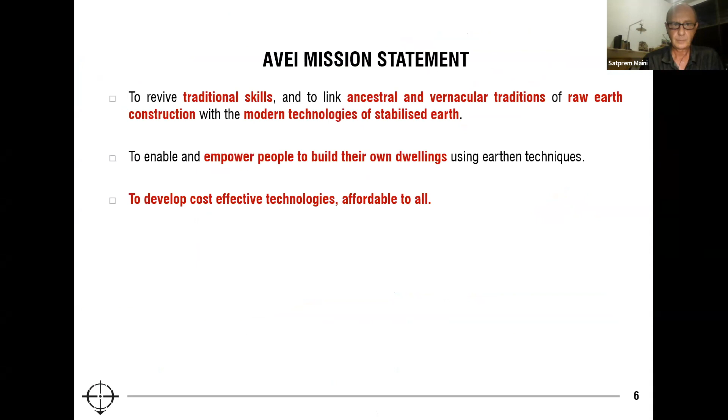So our mission statement is to revive the traditional skills and to link ancestral and vernacular traditions of raw earth construction with the modern technologies of stabilized earth. To enable and empower people to build their own dwellings with earth, to develop cost-effective technologies affordable to all, and important for us, to respect our Mother Earth while using its resources to build a sustainable future. So we try to demonstrate that earth as a building material can be used for creating a modern, progressive, eco-friendly, and safe habitat.

So our premises, which are developed over the years, according to the needs of the development of the Institute. We started with this building here in 1999, this also in 1999. This was built in 2000.

So our philosophy on sustainability: we lay a lot of emphasis on the proper management of both human and natural resources. And we place first human resources, because if people know what to do, then they can have a proper management of natural resources. So we give a lot of awareness programs, training courses, educating people to allow them to manage properly their resources and to give them a livelihood and a skill.

And then comes after, for us, the natural resource management, because people, once they know what to do, can manage properly the resources, to have a properly built environment using the natural resources. It is possible to use earth, especially in respect for nature and for people. So we have trained a lot of people from all over the world, on all continents. A few examples of people that we have trained here.

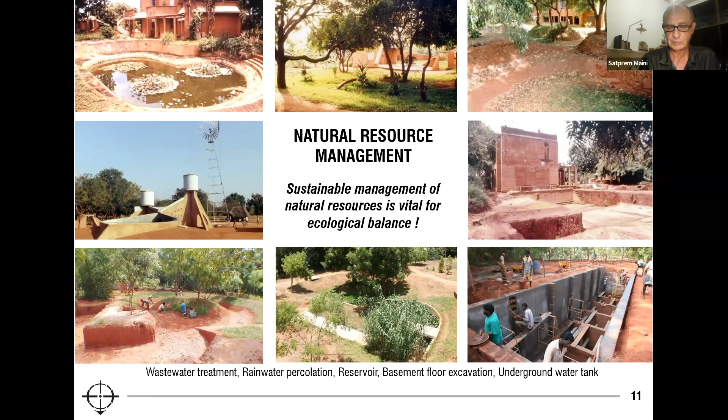So now we'll develop the training activity that we have done in Auroville. We started in 1990, but we were founded in 1999.

So, hello? Yes? Hello? Everything is fine? Okay, yes. Let's go on. Yes, let's go on.

So yes, in fact, I joined Auroville on 31st August 1989, and I started to train people in February 1990. So this is towards the dissemination of earth-based technologies and earth architecture. We have regular courses in Auroville. We have courses for architects, engineers, technicians, students, and masons. We have awareness programs on different topics, long-term internships for architects, engineers, and students. And then we do on-the-job training on different construction sites, since we train local people, from masons to architects, to build something.

We have also other programs in India and abroad. And we have also the courses and on-the-job training. That's what I was doing in Syria for the last 3 months. So of course, we go to different conferences, congresses, and symposiums.

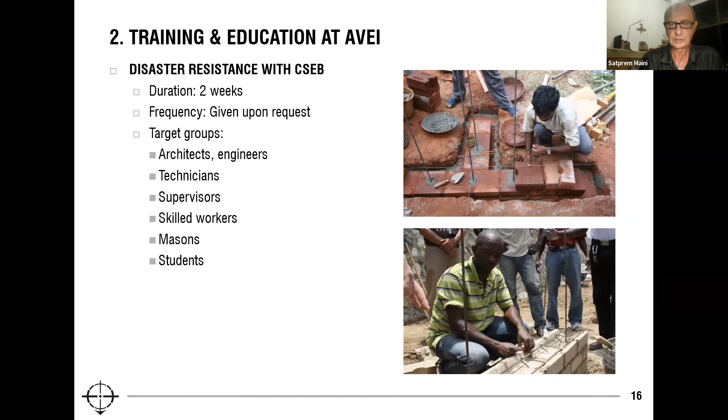Then we have disaster resistance. This was, for example, in Haiti in 2010. This was in Auroville for a project for Nepal. So these courses on disaster resistance are given upon request, because luckily there are not disasters or major earthquakes in the world every year. So we just give these courses when people ask for them, like it was the case for Haiti.

Then we have theory of arches, vaults, and domes, AVD. So we have 1 week for the theory, where people can learn and design some vaults and domes either working on computers or on tracing paper or using this kind of boards here. Then we have masonry with arches, vaults, and domes, where people enjoy building different types of arches or vaults or domes.

Then we have awareness programs, which are given upon request. So this was in Gujarat after the earthquake of 2001. This is in Auroville for different programs that we have. And then we have more and more demand for these training courses. Of course, with COVID, we had a big stop for almost 1.5 years. But now we start again the courses because COVID is receding, luckily. We start again the training courses here.

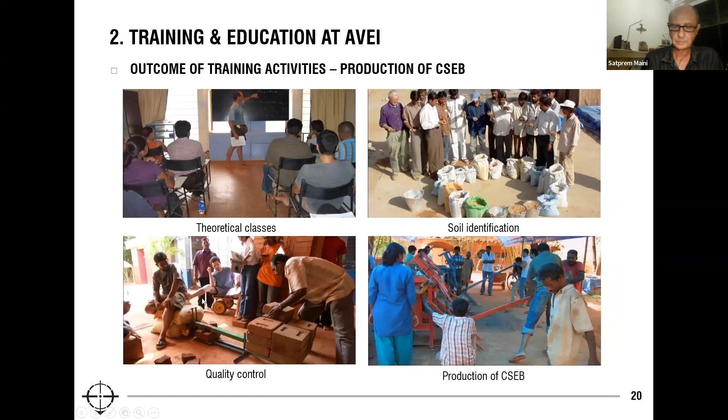And outcome of the training activities. So these are the theoretical classes, soil identification. This was in Gujarat. This is in Auroville. Then again, these are the lectures, bond pattern here. We're doing some rounders walls, rounders foundations, composite techniques like a U-block with concrete inside. So U-CSEB with concrete inside.

Hello? Yes, I can go on.

Then we have outcome of the training activity with arches, vaults, and domes. People enjoy a lot the study of the AVD, either by hand on the tracing paper or on computers. And then you can study that in 1 week. So this can be the result in 1 week work. And then they enjoy a lot building all kind of stuff. So they play a lot.

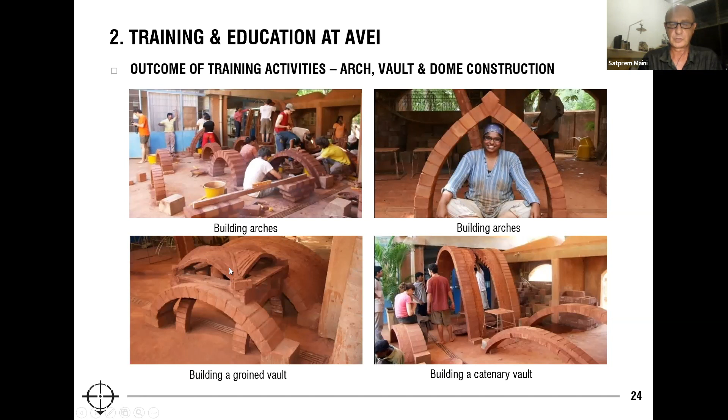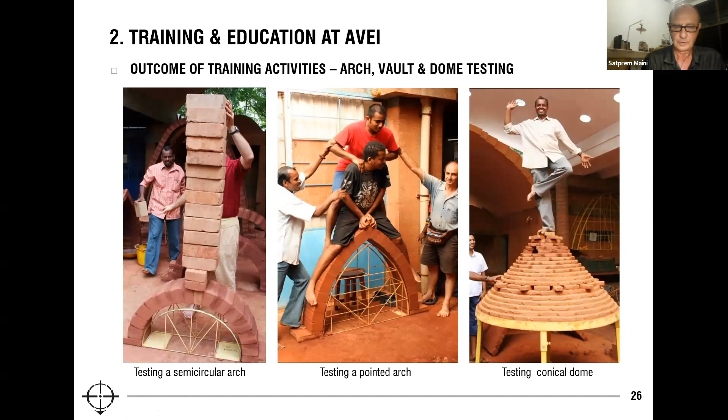So now a small summary, I will go a little fast because this is just numbers. We have trained a lot of people from all over the world. We have in general a little more than 1/3 of foreigners coming to India. So we have different types of activities like awareness programs, courses of 1 or 2 weeks, long-term courses, different courses in India, mostly awareness courses and short-term on-the-job training, and outside also.

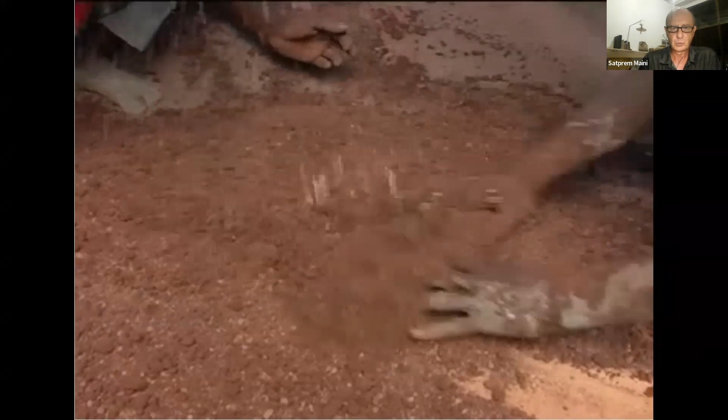So here we mix some soil, 200 liters of soil, 30 liters of sand, and some cement, 5% cement by weight. We mix it dry first. So now we add water, mix it again by hand. And then when the mix is ready, we pour it into the press with a scoop, a hand shovel. We slide the hopper. And when the hopper pushes back, we always level the soil with the same amount of soil into the mold. Then we close the lid.

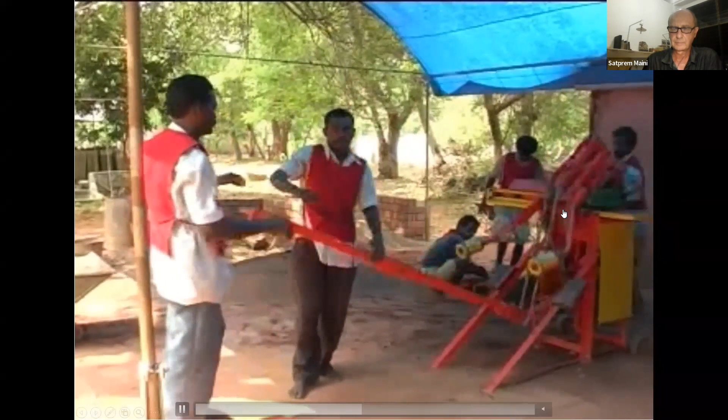So here we have two people pressing the lever to apply a force of 15 tons on the lid. Then there is automatic opening of the lid. And the block is pulled out. So this device is for the strength of the block freshly made. It's called the pocket penetrometer.

When you press till this depth here, you have a certain strength given by the spring, and the penetrometer should not go more than 6 mm. So this is the world standard. So if it goes by 6 mm at this level, the block is well compressed. But you can see here that the penetrometer goes by 2 to 3 mm inside, because our machine compresses more than the average.

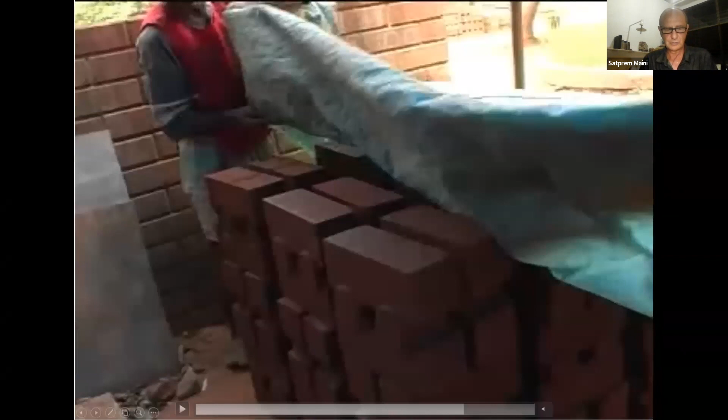And then after that, the block will be stacked near the machine and covered with plastic sheets for 2 days, because we should not allow the block to dry. As you have some cement or lime also sometimes, you have to cure the blocks. It means keep them humid, and you have to keep the block humid for 4 weeks. But the first 2 days are critical. That's why you have to cover them with a plastic sheet to avoid any evaporation.

And after 2 days, the block can be moved outside on wheelbarrows and stacked in a big pile like this and cured for 4 weeks. That means they will be left in the sun and then watered for 4 weeks, 2 or 3 times a day. The principle is that the block must never dry for 4 weeks when you have some cement. If you use lime, it will be slightly different, but you have to cure the blocks also. So these blocks are for earthquake resistance. They're called hollow interlocking blocks.

So now we see, yes, maybe, yes, I can see it. So here you have a CSEB and a fire brick, which are produced locally. So you can see the difference. So this block has 5% cement inside.

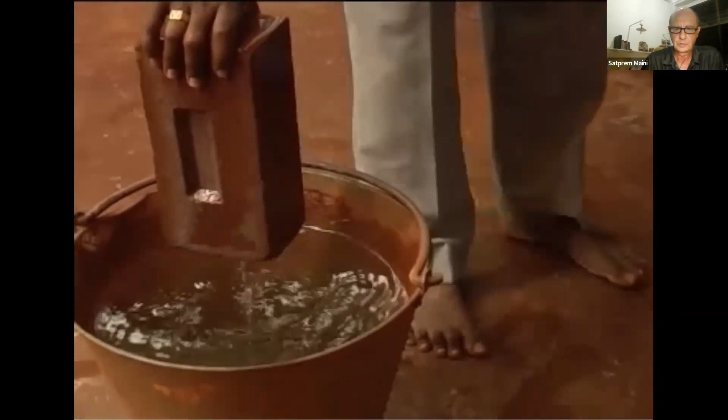And then we see, no, sorry, I already showed that. So this block is in water for 2 hours only. So IIT, the co-director, just steps on it, because often people ask what about the strength when the blocks are wet. So this shows the blocks have 5% cement, in water for 2 hours only. Of course, it can withstand the load of IIT, the co-director.

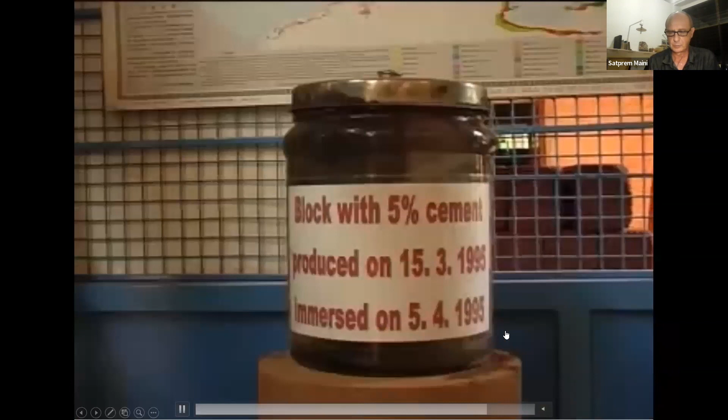But these blocks have been in water since the 5th of April 1995. This means in water for the last 27 years, 1 month and 1 day today. Always in water. And of course, it can resist the load of IIT easily. Of course, this is not a scientific test, but it marks the mind of people because it shows them that, okay, this can resist water and it can take some load.

If you press this block on the testing machine, it will have a strength of about 3 to 4 megapascal. That means 30 to 40 kilos per centimeter square of crushing strength. So now we see the motorized machines which are developed with the workshop Aureka, because we are in collaboration with Aureka. The workshop manufactures the manual machines, and they developed these motorized machines: crusher, motorized mixer, and hydraulic press.

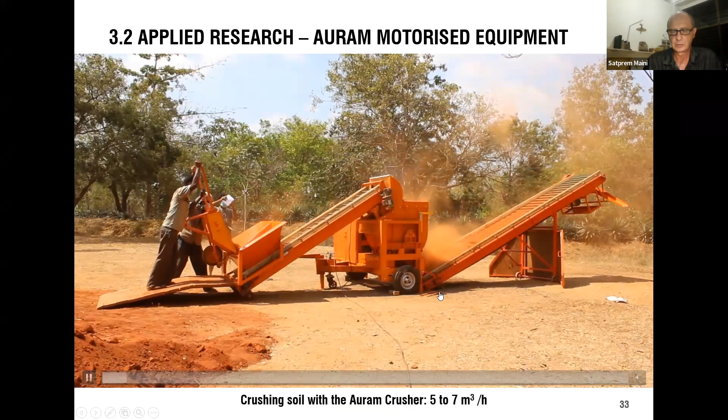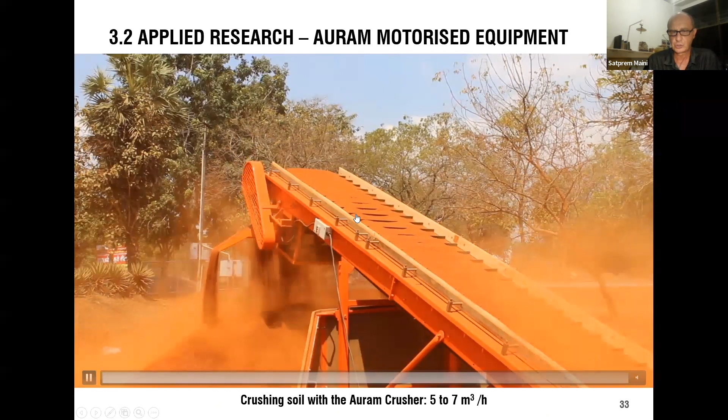So now we can see the crusher in operation. This was a prototype machine with a diesel engine. Now we have only electrical motors. You load the crusher with wheelbarrows. The soil has a lot of lumps, some rocks sometimes. So the helper here helps the loader crush big lumps. The crusher can break lumps up to 100 mm, even stones of 100 mm, and it will come into dust. This is the result after crushing: very fine soil, very fine dust.

The soil can be moved by bobcats, or the crusher can be slid away. It can be rolled, it can be pushed on the wheels. So now we see the mixer and the block making with the mixer. Here we have the sand on one side. We put the sand. We have a partition plate here which can control the amount of sand and amount of soil, because most soils need to have some sand added. Soil on this side.

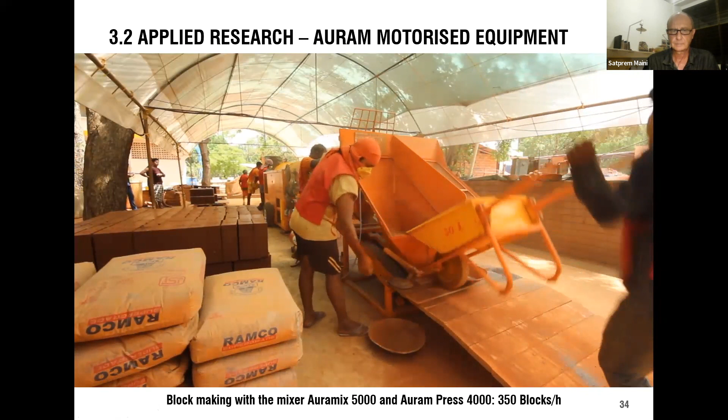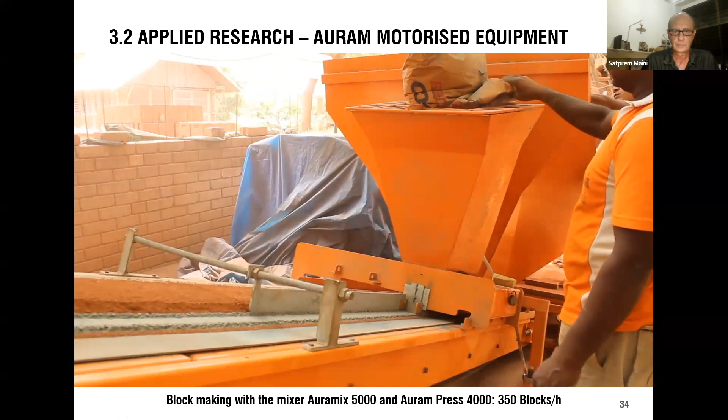In front, you have the hopper for the cement. Behind here, there is a vibrator to help the cement flow down. In front, you have a kind of gate to control the amount of cement you want in the mix. So here we have 5% cement coming to the soil. Soil is here, sand is just behind. Here, the workers control the water flow. There is this valve, and the spray inside the mixer controls the amount of water.

At the beginning of the production, the first minutes of production with the mixer. The mix, sorry, I missed it, I have to go back. Let me see. Come back a little bit.

Yes, in the first minute of the mixer running, the mix is either too dry or too wet. That's why the operator checks that the moisture content is correct. And this one will not be wasted. It will be put back at the beginning of the mixer, poured slowly into the mixer. So now the mix is okay, the moisture content is fine, and this goes to the press. And the helper takes back the first mix and puts it back slowly into the mixer.

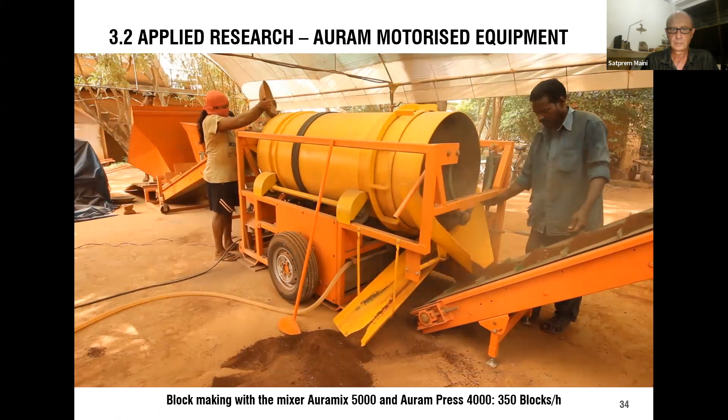So this is a continuous mixer, which gives a really high output. And then the press here. This was a prototype machine. The machine has evolved a lot. This was the first machine, done in 2014, I think. So we have here manual closing of the lid. You see the operator close the lid manually, operate one valve to compress, automatic opening, push the hopper to push the block. The speed of the machine is given by the speed of the operator.

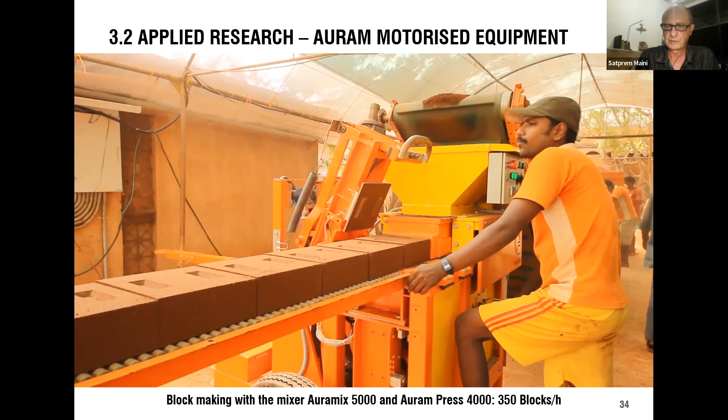This was important for me, developing motorized machines to have a better output per day and make work much easier for the workers, because pressing blocks by hand is a really hard job. So here, for this team with the crusher, mixer, and press, we still have between 18 to 22 people, depending on the type of block yard. But you have more than 2,500 blocks per day. So now we have to control the quality. Again, the penetrometer: you see it goes very little inside because the blocks are stronger with the motorized machine than by hand.

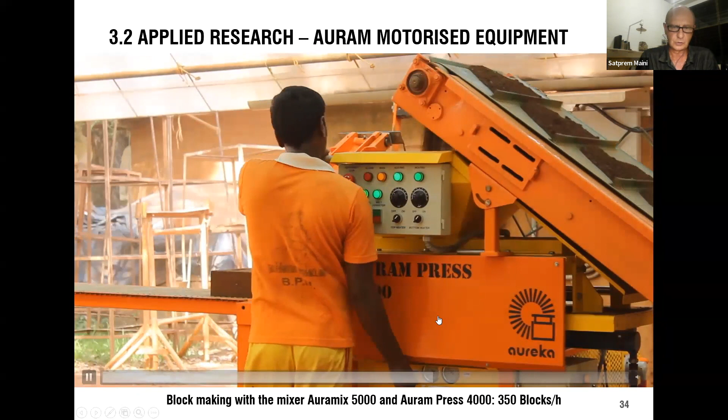So now we stack the blocks on pallet, then we remove the pallet on the side. This means you should have enough investment on the side to have pallet, pallet jack, and forklift, which is the best in fact for the production.

After, we have the pallet wrapped with cling film to allow the block to be cured properly, and also to be moved easily without the pallet opening and breaking down. So here we put some extra water for the curing, because as we have the cling film, we don't have to cure the blocks by watering like we did for the pile outside under the sun. That's why we cover with cling film, and we cure for 1 month.

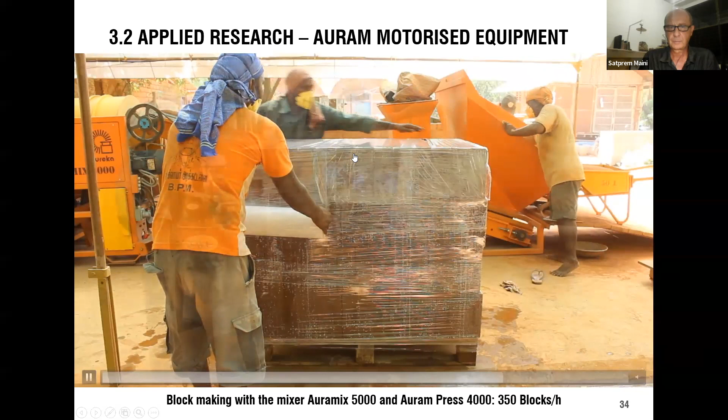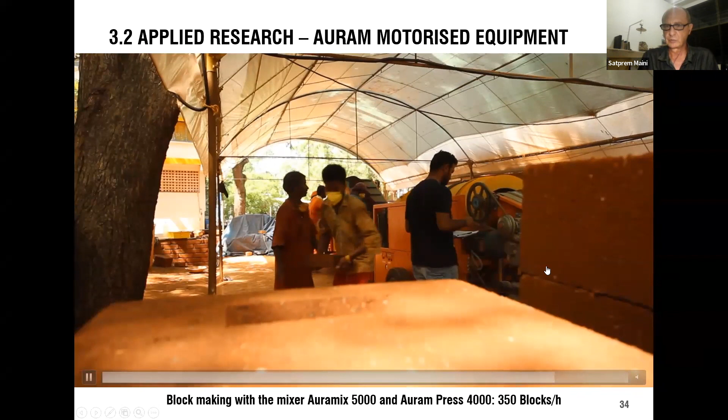And so now the pile is ready to be moved outside. If you don't have a pallet jack and forklift, you can stack on the ground with the workers, but you need more workers for this process, and sometimes you may have to stop the machine to move the blocks. It's always about finding the optimum investment for the machinery and the manpower on site.

So now we're seeing the different things on the compressed stabilized earth block, the machine, the Auram Press 3000. It's composed of soil, cement, often 5%, it can also be lime, and often you have to add some sand, and then you press it.

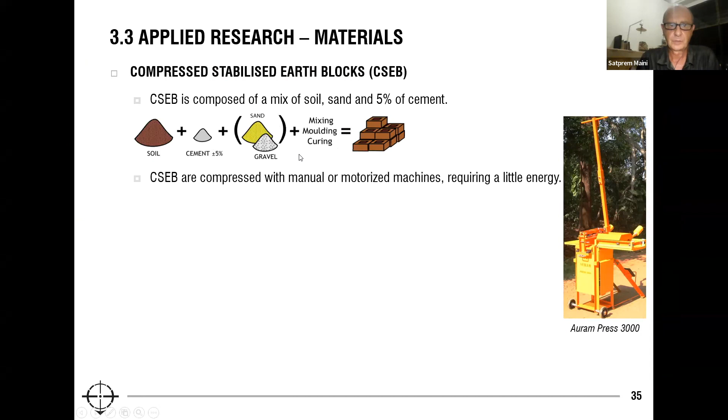And then we have here, they are compressed either manually or with a motorized machine, like you have seen. They don't require a lot of energy. They're not fired, meaning they emit much less carbon emissions compared to what we call country fired bricks. You will see some photos of that after.

I will go a little faster because after we have a full lecture on CSEB. So yes, we do a lot of research on the type of blocks. We have here about 70 different blocks produced with one machine. So we have energy efficiency.

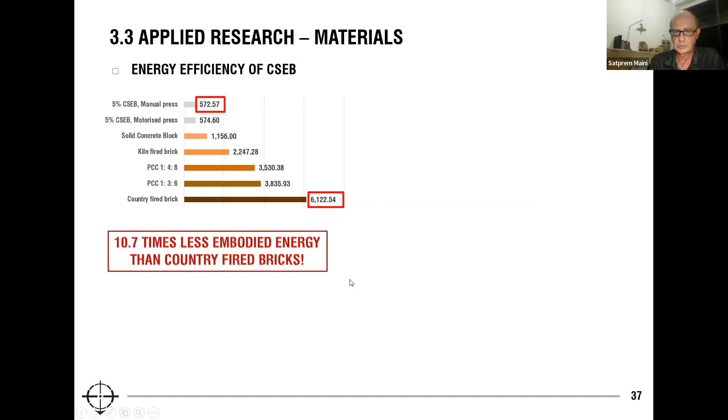We have about 10.7 times less embodied energy than country fired bricks in India. Then we have carbon emissions 11.8 times less. If you compare to concrete blocks, it will be about 4 to 5 times less. If you compare with reinforced concrete, it will be about 8 times less.

This limits deforestation because we don't need firewood to produce CSEB. The main source of energy is coming from cement or lime, and lime will produce less carbon emissions also. For example, this is what they do in Tamil Nadu in India, they burn 50 tons of wood for 100,000 bricks, and they burn a lot of wood for that.

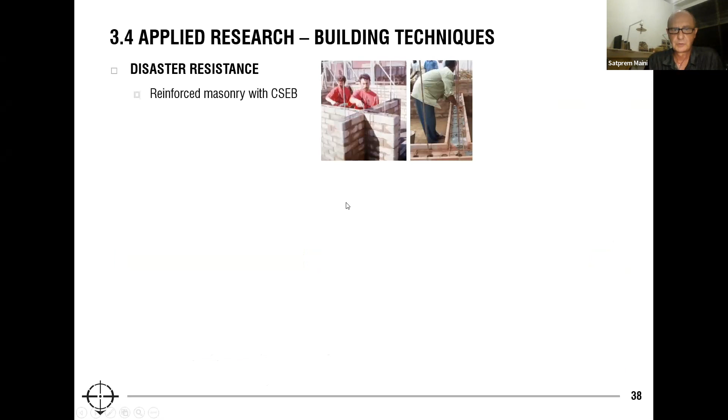So we have disaster resistance, we use reinforced masonry, which is reinforced for earthquake resistance. This house was built in 66 hours in Delhi as a demonstration. This one was built in 62 hours in Gujarat. In fact, both houses have been precast in Auroville, transported to Delhi and to Gujarat in the north of India, and assembled in less than a week. And this was built in Istanbul for the seismic habitat in 8 days.

And this one has a dome, there's a square dome here. And this was built in Tamil Nadu after the tsunami of 2004.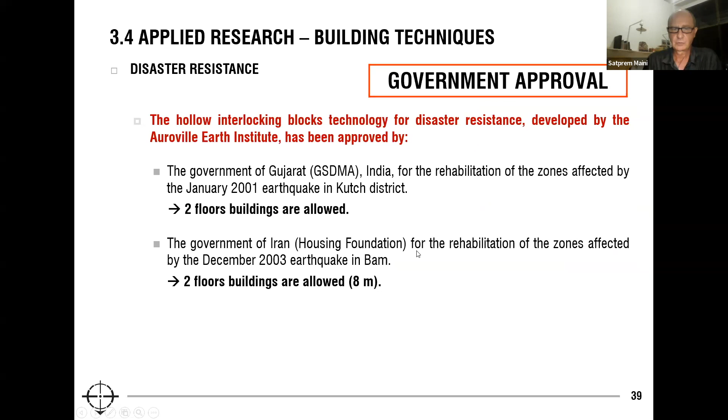So we have government approval with this technique, first from Gujarat in India after the earthquake of Kutch in 2001, then the government of Iran after the earthquake of Bam in 2003, and then finally from the government of Tamil Nadu in India after the tsunami of 2004.

So this is the result of the work that we did in Gujarat. In fact, we have assisted the Catholic Relief Services to build, in about 1 year, 2,698 houses in 39 villages, employing 2,000 people.

In fact, we ourselves worked maybe 6 months in Gujarat to give training courses, evaluate their work, guide them, and this was the result of their work.

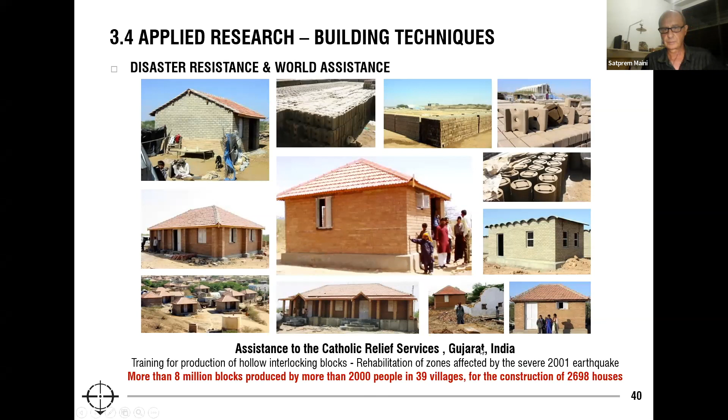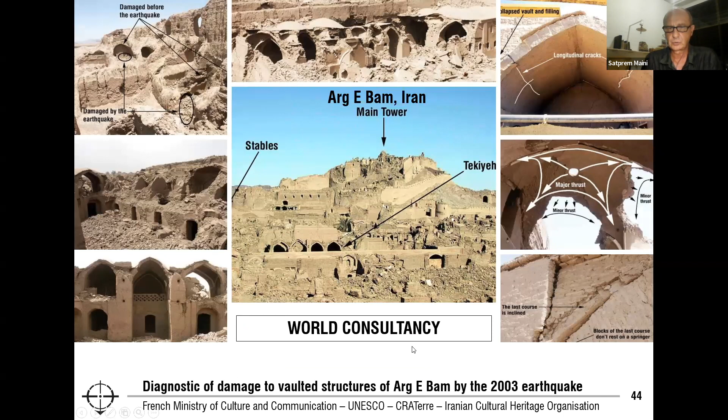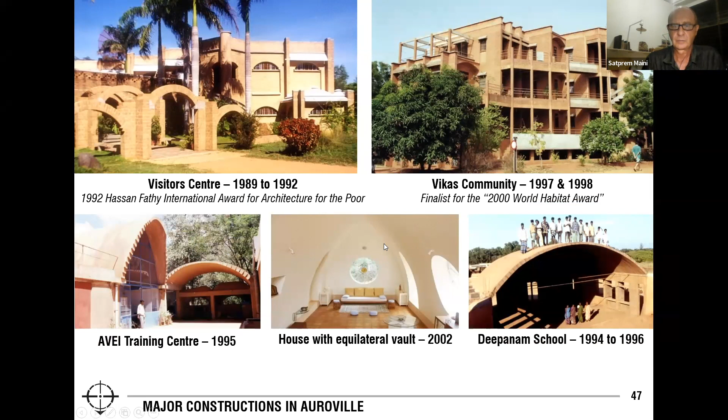And then the Kaza Community Centre in Spiti in Himachal Pradesh, in the north of India, very close to the Tibetan border—in fact the Chinese border, Tibet is just behind here, or China. This was built in 2015, finished 2015.

It's an earthquake-resistant building with solar passive heating, using a trombe wall and rammed walls. We don't have any heating other than the sun. A very effective system—in winter, March 2019, outside temperatures were minus 22 degrees Celsius, inside plus 10 in this room here.

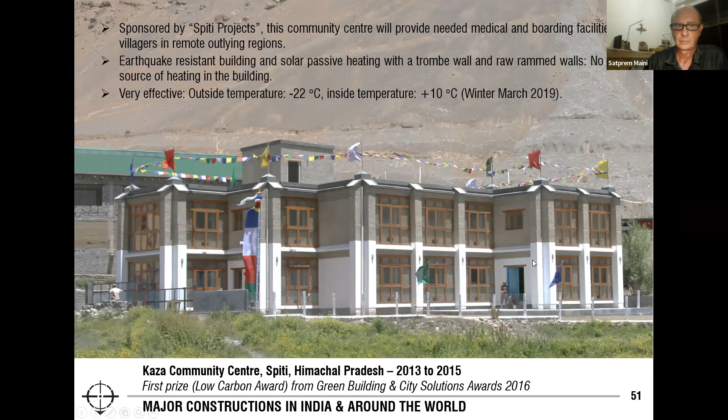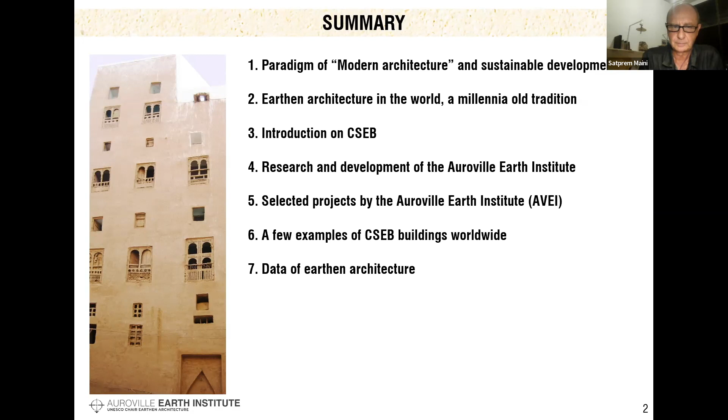Then we have Earth architecture in the world, with a small introduction of what happened all over the world since millennia, a bit more introduction than what we had on CSEB. The results, maybe I will pass because there is an overlap between both. And then selected projects that we have done and different buildings worldwide, and some data on Earth architecture.

So this is something that is like a lot - modern cities are looking all the same. This is Cairo. It can be the suburb of Chennai or Delhi. This is New York. It can be the same like Mumbai or Delhi also, or like in France, Paris, and so on.

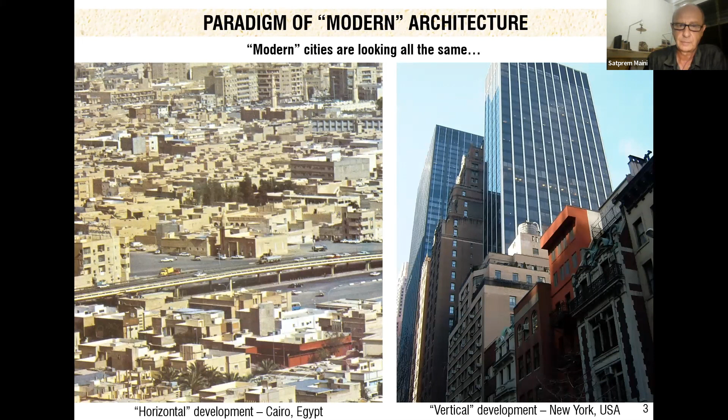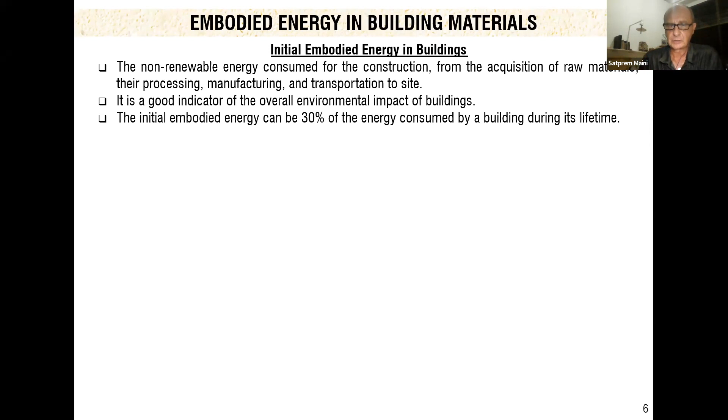So I will have to mention here what is initial embodied energy in buildings. People are often not aware of it. It is a non-renewable energy consumed for the construction, from the acquisition of raw material, their processing, manufacturing, to transportation to the site. It is a very good indicator for the overall environmental impact of buildings. And it's important to know the embodied energy of a building can be about 30% of the total energy consumed for the building during its lifetime. So this is not small amounts.

And now we have the recurring embodied energy, which is energy consumed to maintain, repair, restore, and refurbish or replace materials during the lifetime of the building. And operating energy, which is energy required to use the building for heating, cooling, ventilation, and so on.

And now we have different materials data on this: aluminum very high. In fact, often these numbers don't give any idea of what it is, but you have to compare the results - aluminum, steel, toughened glass, country fired bricks in India, reinforced concrete, plain concrete and CSEB. So you have to relate this amount to see the ratio between these two.

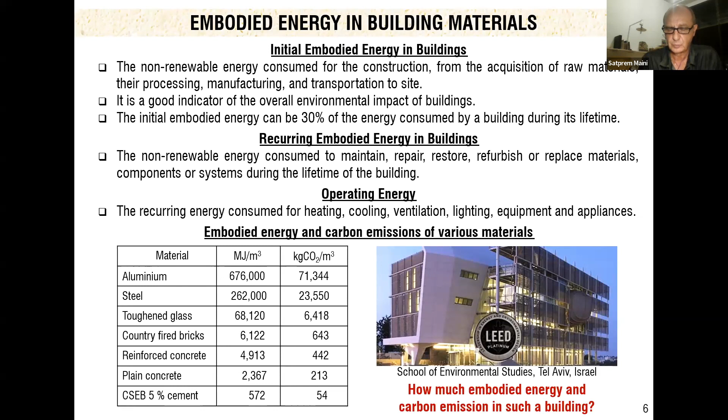And that's often what I criticize a lot from the green buildings, like the LEED buildings, the platinum buildings and so on from LEED - they deal only with operating energy. They don't deal with embodied energy. And they use a lot of aluminum, steel, and toughened glass and so on. So example of this one in Israel - this is LEED platinum. So they have nothing green. They just consume less energy for operating the building, but how much energy goes into this aluminum, glass, and so on.

Example also of the concrete industry in buildings. Cities take about 2% of the Earth's surface, but they consume 75% of the natural resources. Construction sector is responsible for 40% of consumed resources, 40% of CO2 emissions, and 40% of waste. And the buildings account for 30 to 40% of the total global energy usage.

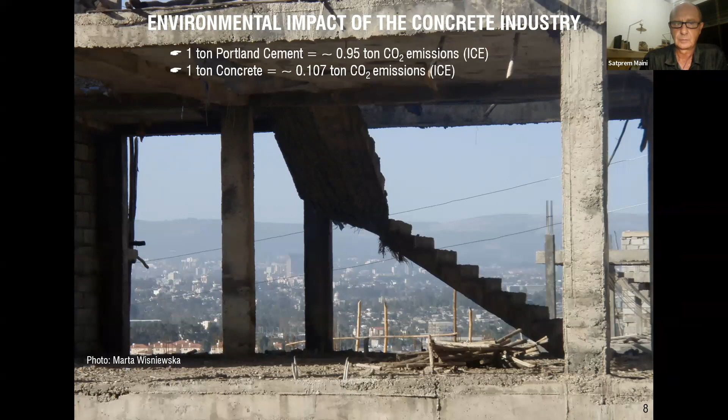So again, the same deal: 1 ton of Portland cement is about 0.95 tons of CO2 emissions. 1 ton of concrete emits 0.107 ton. Cement accounts for about 5% of global emissions, some even say 7 to 9%. Now, these are not small amounts.

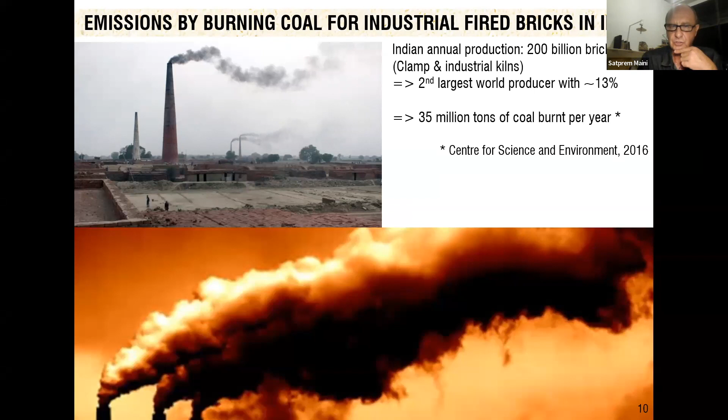So in the north of India, they burn mostly with coal. It is even worse because you have this kind of production in India. India is the second largest producer of fired bricks, 13%, just behind China. They have 35 million tons of coal burnt per year. And you have this - it's beyond imagination.

And another definition from the wisdom from the past. No, in fact, I passed this one. This is from the Isha Upanishad from India, a very old text, which is maybe thousands of years old. All in this manifested world consisting of moving and non-moving are governed by the Lord. Use its resources with restraint. Do not grab the property of others, distant and yet to come.

So this speaks of two things. First, management of resources, but also equity and honesty. This we really miss in the world today. And then from the Kenyan proverb: treat the earth well. It was not given to you by your parents, it was loaned to you by your children. So this is the same definition, I would say, just said in a different way. That's why we have to be careful with what we do with resources.

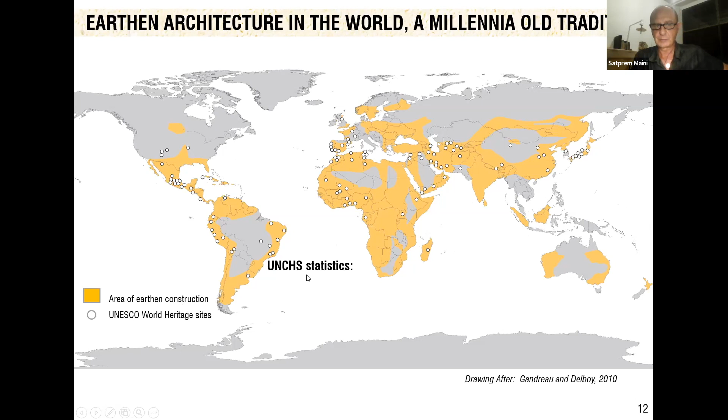So as examples of earth construction worldwide, this is a map where you have earth buildings all over the world. The dots here are the UNESCO World Heritage Sites. This is from UN-Habitat: you have 50% of the world population living in earthen dwellings. 25% of the world population does not have access to decent housing.

And UNESCO states that 17% of the world cultural heritage is built with earth. 25% of the world heritage in danger is built with earth. And 40% of the 100 most endangered sites is also built with earth.

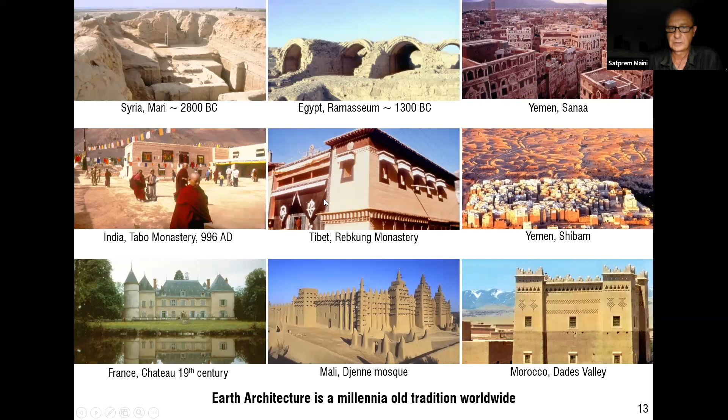So now we see a CSEB more in detail. We have 5% cement in general with soil and sand and water, compressed in a press, manual or motorized. They can reach in Auroville a dry compressive strength of 9 megapascal. Often you have 6.5 as an average here. Wet strength will be a little less, like 4 megapascal. We never use the topsoil. Topsoil is always removed and kept for landscaping later. So we always take the subsoil below the topsoil.

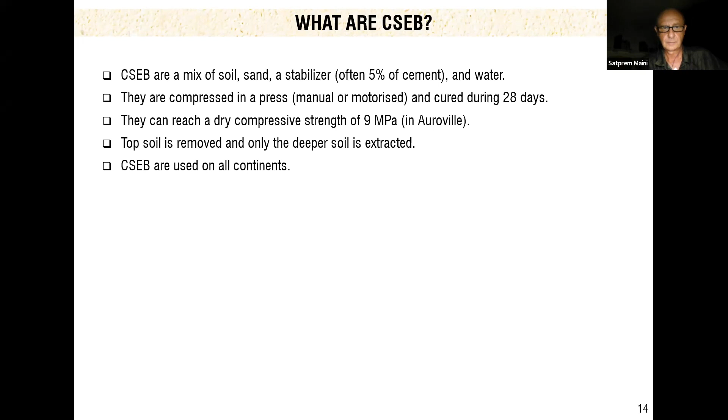They are used on all continents. And they have been, for me, a major tool of the renaissance of earth architecture worldwide since the 1950s. And it is today the technology used the most worldwide and also in Auroville. So the first press for block making was the CINVA-Ram, developed in Colombia in the 1950s. This press has been used a lot, copied a lot, and you can find online some plans for it. And we became one of the leaders of this technology.

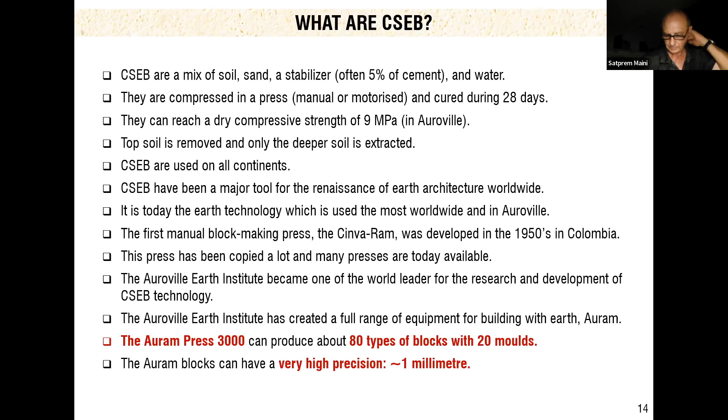And we have a full range of equipment like we have seen before. And we have a machine, the 3000, which can do about 80 blocks with about 20 moulds, with a very high precision, up to 1 millimeter difference in thickness. So this is a machine which we produce; in fact, a few machines are produced worldwide. The CINVA-Ram from Colombia, machines from Europe, from India. This is Auram from Auroville. This is from Belgium. This is a motorized machine from France, USA, others from South Africa.

So now some data. We have dry compressive strength. It varies from 5 to 9 megapascal, as an average 6.5 in Auroville. Wet compressive strength will be much less, 3 to 4 megapascal. That's why you always need to know the wet compressive strength, which is the minimum strength for the blocks, to use it.

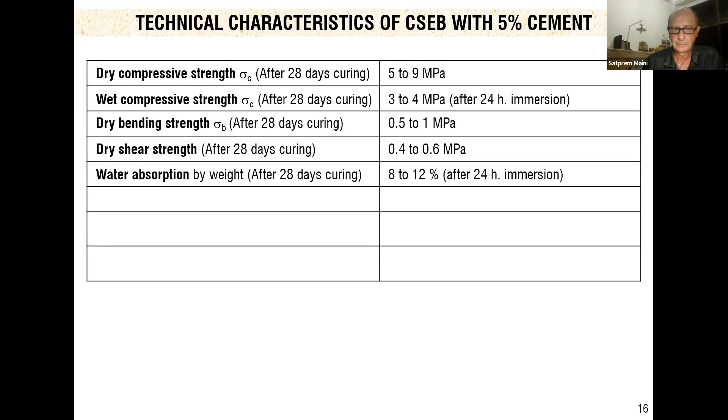Then you have dry bending, which is much less, 0.5 to 1 megapascal, but you don't have bending in a building normally. And shear is the minimum strength, 0.4 to 0.6 megapascal. And shear can be avoided with a good design. And then water absorption between 8 to 12%. Apparent bulk density, an average of 1,900 kilos per cubic meter in Auroville. Embodied energy, like we have seen, 10.7 times less than country fired bricks. Carbon emission, 11.8 times less.

So this is to remember what MPa is, in case you forgot. This is for Auroville soil after 28 days of curing. And these mechanical characteristics are influenced by different factors. First, the soil quality, then the compression ratio, that means how much the machine can compress, the force applied by the press, the quality of manufacturing, especially the curing, and of course, the quality and percentage of stabilizer.

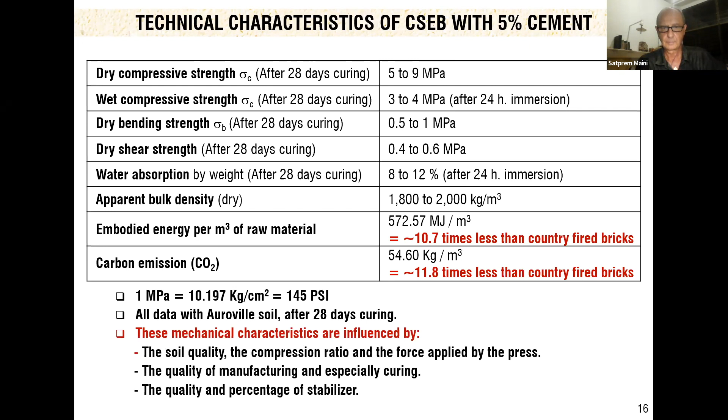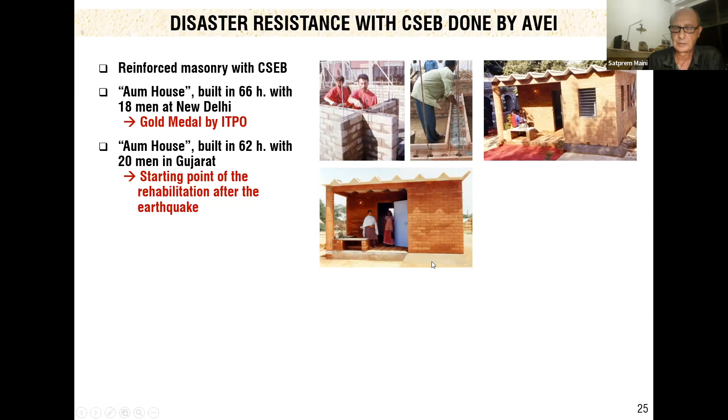So reinforced masonry now. What we do here, we have vertical reinforcement in the corners of the building and at different intervals in the length of the building. And the blocks are hollow interlocking blocks. That means they have a key here, which can interlock. So both these buildings have been precast in Auroville, transported to their place in trucks, and built in a very short time. So this you have seen.

So then government approval. First we had approval to build two floors in Gujarat. And basically they have approved the strength of the block, because the blocks are strong enough to take the earthquake stress. And we add also extra strength from our design for the reinforcement of the blocks with the different vertical bars and horizontal bars. And then Iran the same, and Gujarat and the tsunami for the Tamil Nadu government.

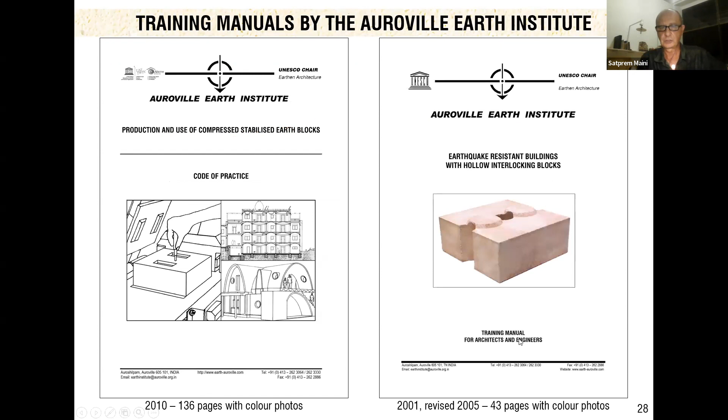So you will have this kind of books. This is the production and use of CSEB, the code of practice that we have published, 136 pages. We have also an earthquake resistance manual. This is for architects and engineers. We have also building with arches, vaults and domes. In fact, this has been updated last year. It's 229 pages with more than 400 illustrations. I have to correct that.

And then work specification, which is a document which summarizes all the different ratios and research we have done on different techniques, with the mixes for different soil mixes, soil stabilized mixes, even concrete and so on. This can be purchased from us.

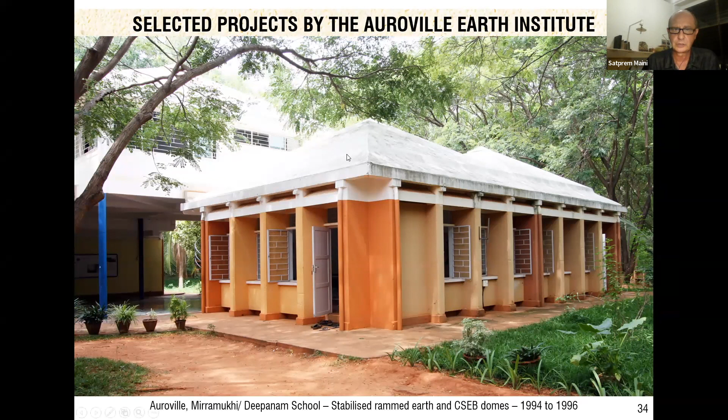The vault of Deepanam school, 10.35 meters span, built in 3 weeks. With this team, here you had 4 masons and workers to build the vault. Very thin vault, 17.7 centimeters at the bottom, 40 centimeters from here to here.

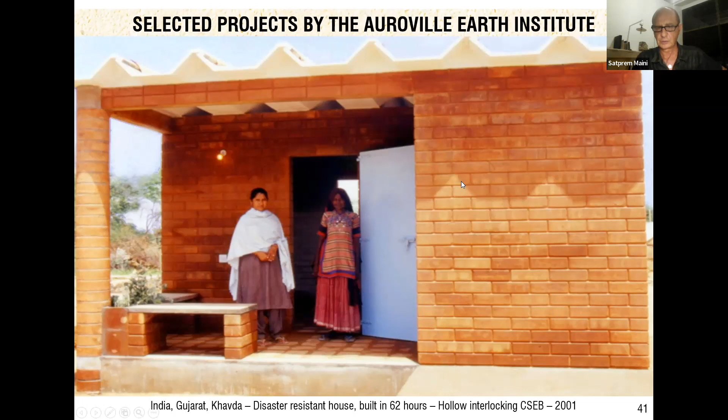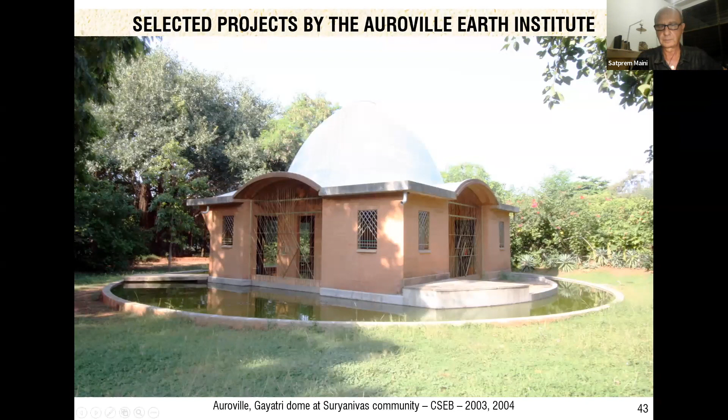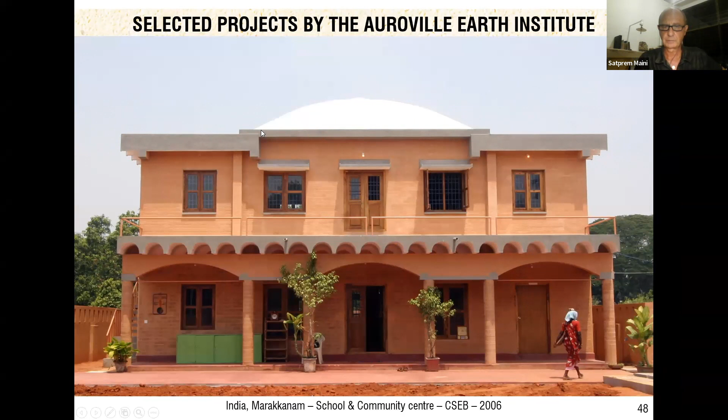A school and community center near Auroville. So we have here what we call ferrocement channels that we use a lot with vaults and domes. You have a square dome here, 7.5 meters span square with ferrocement channels.

And what was very good was not just the time to build the school, but the project went ahead. The same team of masons went into different villages after to build different schools in the same time. And they could manage without my help to build schools in about 20 days. And this is 2 classrooms for 100 square meters of building. And this building has resisted the quake of 2015 in Nepal.

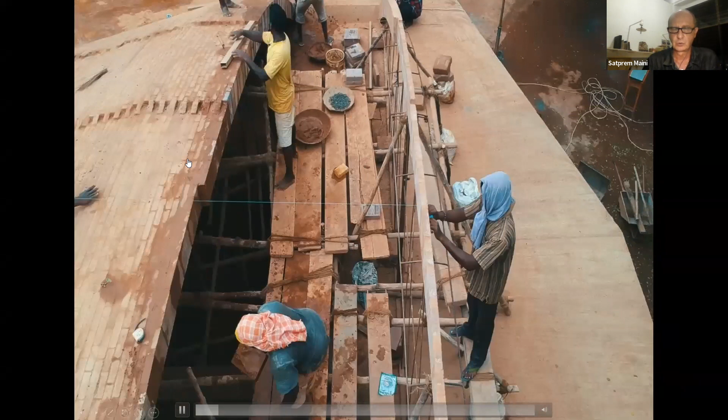So this is how it is built. So we don't use any formwork for that. You can see here we have a template. The template gives just a shape, and then we have to put some string lines. Of course, I cannot show the whole process of the construction, but the whole construction was built without any formwork. We just move the template time to time to put the string lines. We have a conical shape here.

So the mason sticks the blocks onto the previous course with just earth mortar. In fact, the glue, because it's a glue. You see, he just laid some stabilized mortar on the block and lays the block. So here the mason grinds some block to have a smooth finish for the next course, if there is any irregularity in the thickness of the blocks.

You see the mason here just slides the blocks up and down after putting mortar. It just takes maximum 5 seconds to lay the block, and then you go on.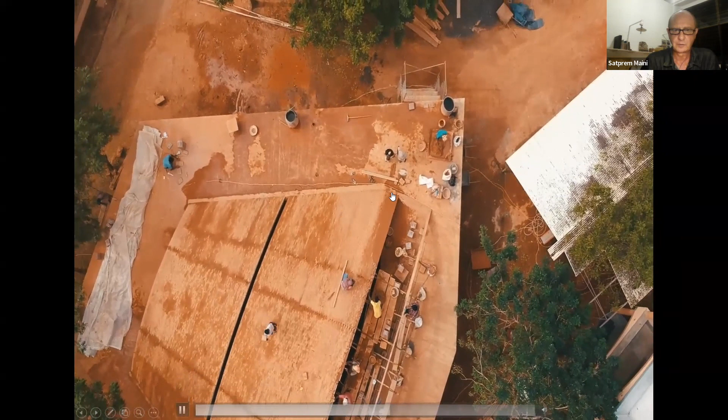So we have here a 15-meter span, one 5-meter span. And we have here a conical shape starting here at 6.61 meter span, then rising up to 15-meter span, and then the barrel part here of 15-meter span also. And we kept here a gap for the skylight and for the ventilation of the room.

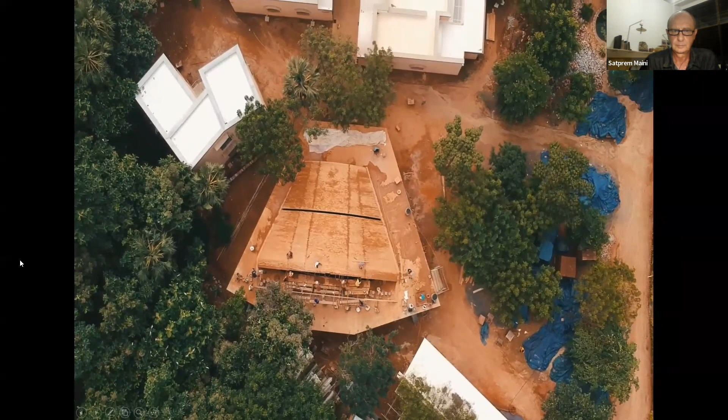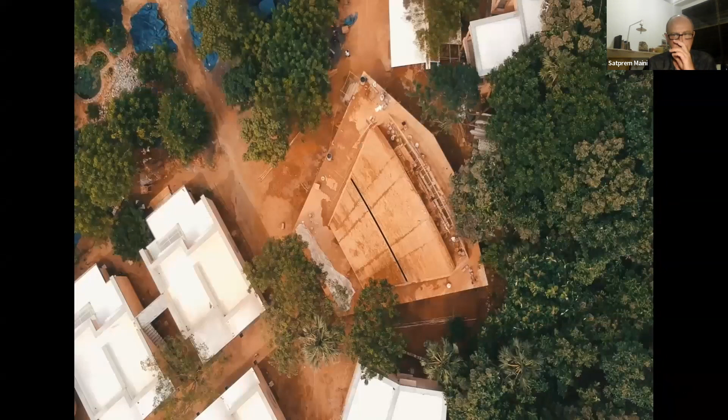So you can see here the steps that we have because of the conical shape of the wall. And this is very good for the acoustics, because this minimizes the echo and the reverberation. Okay, so this building, before the finishes were done, was just raw construction.

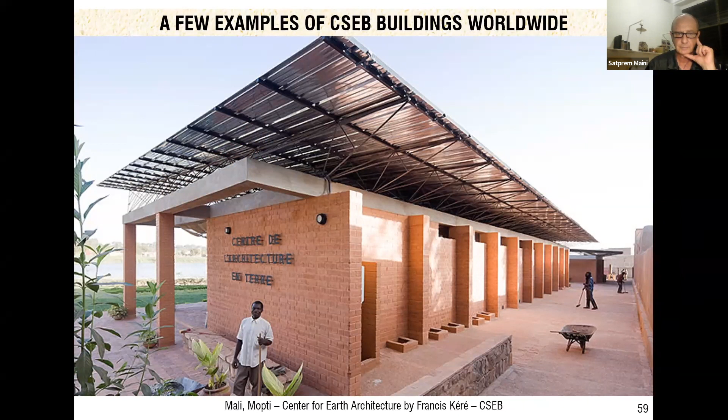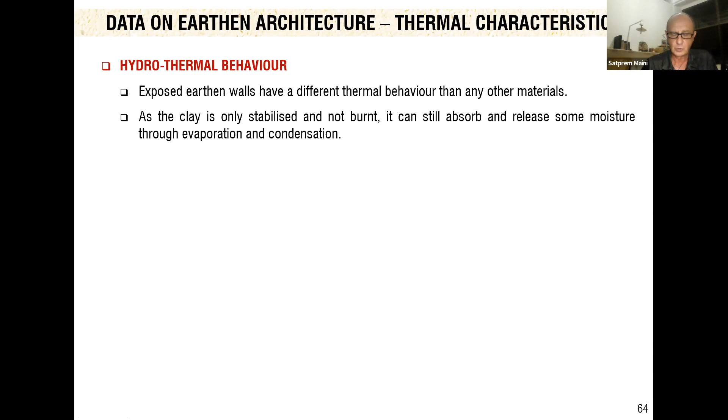So now we'll see some data on earth architecture. Hydrothermal behavior. We mention the name hydrothermal because earth has a different thermal behavior than other materials, with water. Because clay is stabilized and not burnt, the clay can still absorb moisture and release moisture. So when the earth absorbs water, it will condense and create heat. And when the block evaporates, it will cool down the building. So this is called latent heat.

This constant migration of moisture through the wall can either cool down the building by evaporation or heat the building by condensation. And this can be an enormous amount of energy. So when the outside temperature is higher, the wall evaporates moisture, so the building will cool down. When it is lower outside, the wall will condense moisture, and this will create heat. That's why this is more effective in temperate climates than tropical climates.

And there is a saying in France: in the countryside, people say that rammed earth buildings are hot in winter and cool in summer because of this latent heat. And in the Himalayas, it's the same. It can really regulate the temperature of the building a lot, and we don't need any air conditioning.

Especially in Tamil Nadu, as we have a very hot tropical monsoon climate. Now we have about 36, 38 degrees these days, with humidity between 55 and 65%. So really hot and humid. And we have a lot of natural ventilation in the buildings. That means we need much less operating energy for the building.

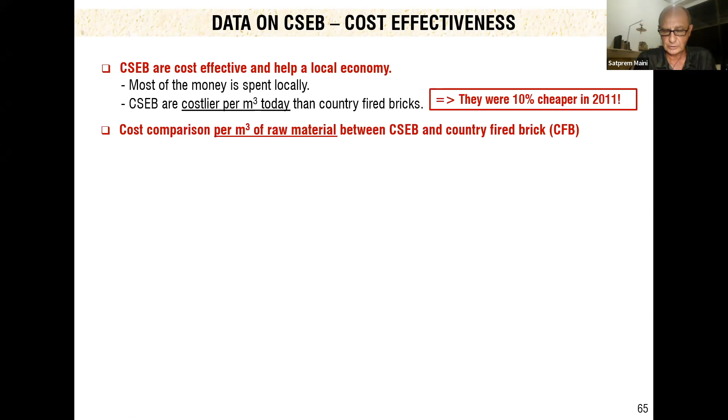And in fact, the market in the Pondicherry area, because we are close to Pondicherry, is a bit crazy. And we can compare the cost of the raw material of CSEB and country fired bricks, because the blocks are bigger than the bricks. So these are the costs that we have these days between country fired bricks and CSEB. And when we compare the cost, we're 8% costlier today.

And one of the reasons is that the country fired bricks are often produced by bonded labor. Bonded labor means slaves. It means the labor is bonded to the employer by different pressures of money and they are made to work, and then they can't escape. That means we cannot compare the cost of our blocks and the cost of the bricks, because our workers all have social insurance.

In fact, we have different terms for that in India, but let's say the social security system in India costs us 33.6% of the salary. Of course, this cost has to be added to the cost of the blocks, when the bonded labor has nothing. It's just like a slave. That's why we cannot compare the cost, in fact, because of that.

But when you compare now the cost per square meter or cubic meter of masonry, that means the wall, then we are cheaper. 16% cheaper per square meter of wall, and 26% cheaper per finished cubic meter of wall. And why? Because we have much less mortar required, 15 to 60% less mortar required.

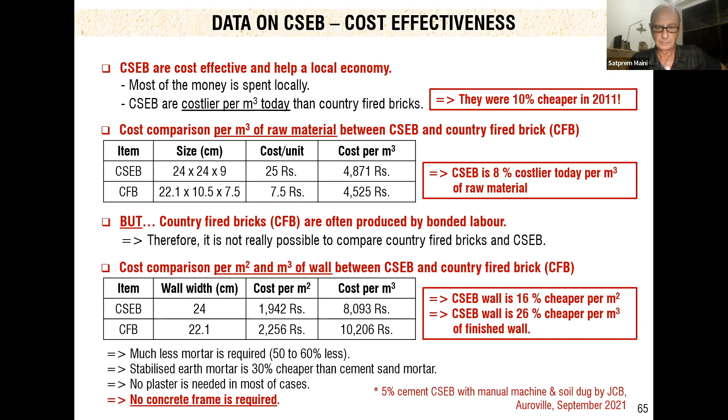So it is a very labor intensive technology. As I said, you have 13 people per press for the manual pressing. This gives job opportunities to people, and of course, livelihood. This can ensure sustainability for the place.

And the cost breakdown for CSEB, this was last year, so let's say about 6 months ago, more or less. So we have here the different costs. Labor is about 36% of the blocks. Soils and raw materials about 40%. Cement about 15.4%. And equipment about 8.4%.

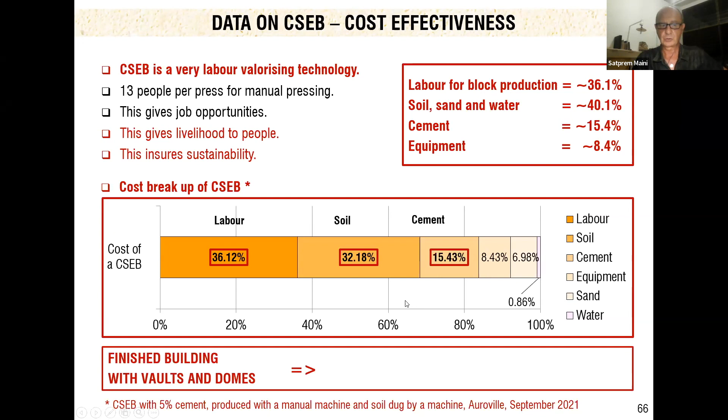And what is important is to remember that the main cost of the block goes to labor. You have also soils and cement. But if you compare to concrete, you have opposite ratios. I will mention that for the building which is finished. When you have especially vaults and domes, the labor represents 60 to 65% of the building cost. Of course, material is the opposite.

If you have a concrete building, it is just the opposite. You have about 60 to 65% of material cost, and the rest goes to labor. That's why, what is happening here, the money stays locally with people who work in the villages around Auroville.

So examples of the management of resources, we have just different photos of the same thing. You have here a basement floor, a wastewater system here, rainwater harvesting systems, and so on. So local authorities and people can manage their own resources. Quarries resulting from the sources of soil can be used for different things like you have seen, from underground rainwater harvesting tanks, reservoirs, surface rainwater, landscaping features, wastewater systems, basement floors, and so on.

It can be very beneficial for the development if it's well planned, but very disastrous if you don't do it. That's why you always have to plan in advance what the hole can become later, to use for the development of the place. That's why you have to make a plan before, and do it after the quarry is done.

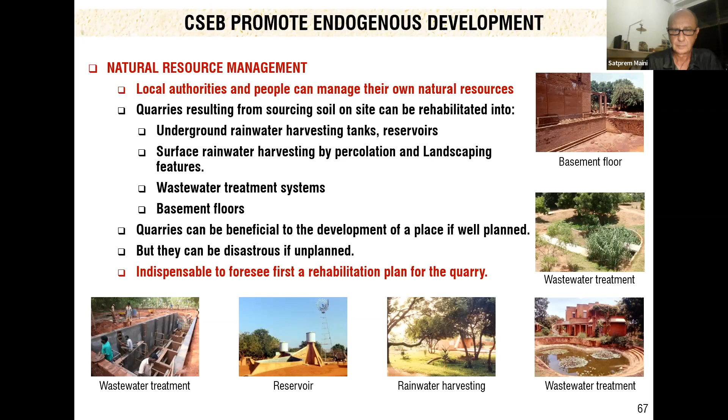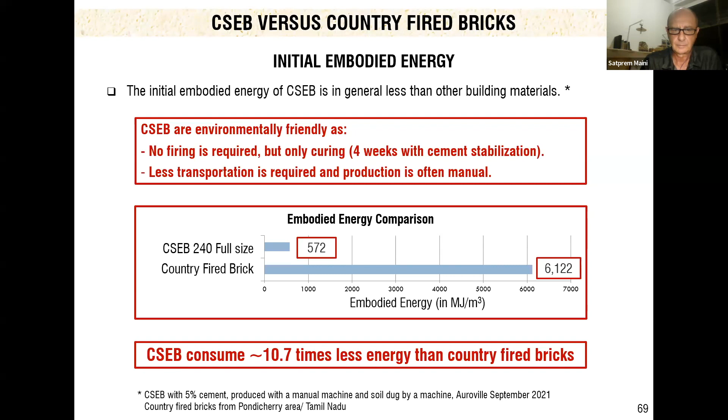So yes, I come back on that because this is important to remember this, and compared to fired bricks.

Examples now of the residential apartments in Auroville, which were built in 3 blocks. We have here CSEB and stabilized earth from the foundation to roof, rainwater harvesting systems, wastewater treatment system, earth tunnel for the natural air conditioning. Initial embodied energy was about 4 times less than a normal building, like concrete frame and RCC, which is for reinforced cement concrete.